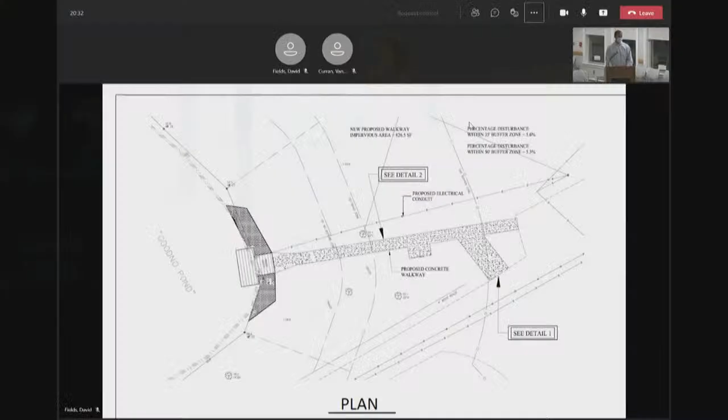Right, we're also trying to keep, I think, in matching the aesthetics of the place. I know you talked about pavers, and I think concrete would also be a good alternative, but asphalt would probably be a little bit out of the norm of what you typically see at the park. Thank you, that's all I have.

Chelsea, any questions? Not really. I'm very familiar with this site, I'm at this park like once a week. I know the path this is replacing is just a worn out area of dirt, so I think this will be an overall improvement. Aside from access, which is very important, I think this will improve the site. So yeah, I have no issues.

Vanessa, do you have any questions? No, I also agree that this is an improvement.

Okay, then just one final question on my part. If you had the money, would you do pavers instead of concrete? I guess that's more of a question for Chris Sanborn, who runs the show over there. I'm not sure if he'd want to do some type of fundraiser, if people would want to donate bricks, what type of bricks or paver he'd want to use. That's something we can definitely talk about. If you're more inclined to have pervious pavers, we can have the discussion and come back to discuss our options.

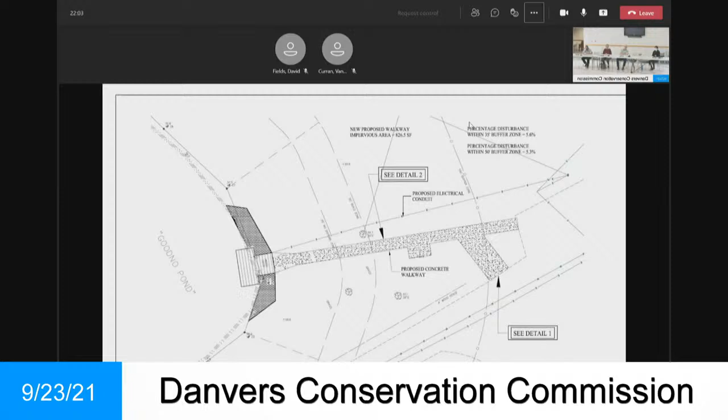What's your timing on this? You want to do this quickly? We'd like to do it within the month of October, as quickly as we can, before the winter hits, because the fishing pier should be constructed within the next 2 weeks, and once that's completed, we'd like to tie in the walkway as soon as possible before the winter.

Okay, so Chris Sanborn is the director over there? Correct. Okay, so we'll leave it up to his judgment.

Okay, are there any questions from the public? Sir?

Bill Bradstreet, Town Meeting Member, Precinct 1.

Out of the options presented, I think the worst of them would be the asphalt. It could be somewhat hazardous, with the leaching of the asphalt into the ground. That would be the last option, as opposed to what was presented with the concrete or the pavers.

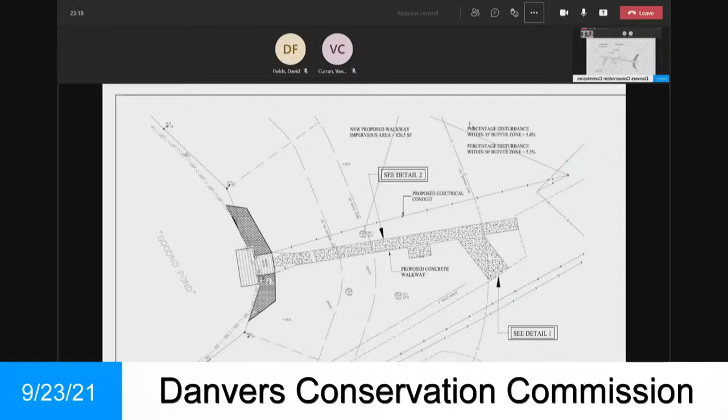I don't want to speak for Chris Sanborn, but I think from a maintenance standpoint and permanency, the concrete would probably be a better option than the pavers. The pavers would probably be fine for several years, but if they start to shift or move and they go in to do snow removal with any type of equipment, it could ding a paver and then you'd have to replace that.

I'd be concerned about wheelchair access if the pavers shift. Well, my argument to that is you can go in and repair pavers. Concrete is permanent, and if this park ever goes away for whatever reason, that concrete is there and it's got to be removed. But that's a personal opinion of mine.

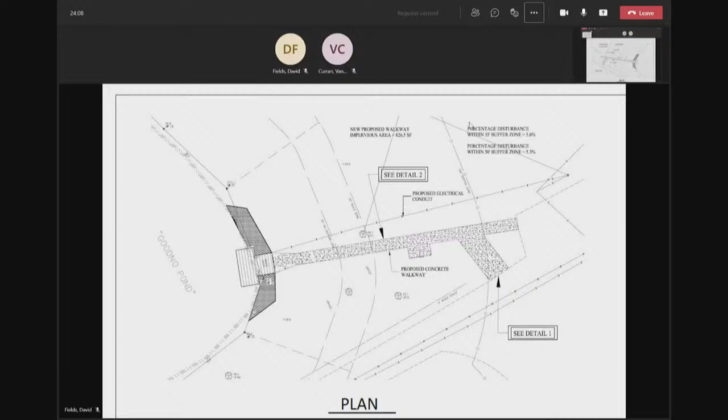Okay, no other comments from the public? So the first item we need to do is close the public hearing. If someone can make a motion. I make a motion to close the public hearing for 21 Ingersoll Street Amendment Request, DEP file number 14-1358. Is there a second? I second the motion. All in favor? Aye.

Now if someone wants to make a motion that we amend the existing order of conditions to allow the construction of this walkway. I'll make a motion to amend the existing order of conditions for 21 Ingersoll Street, DEP file number 14-1358. Motion's been made, is there a second? I second the motion. Before, let me just take a step back.

Any other conditions, Chelsea? Did we do anything? No specific conditions. Okay, motion's been made, is there a second? I second it. All in favor? Aye.

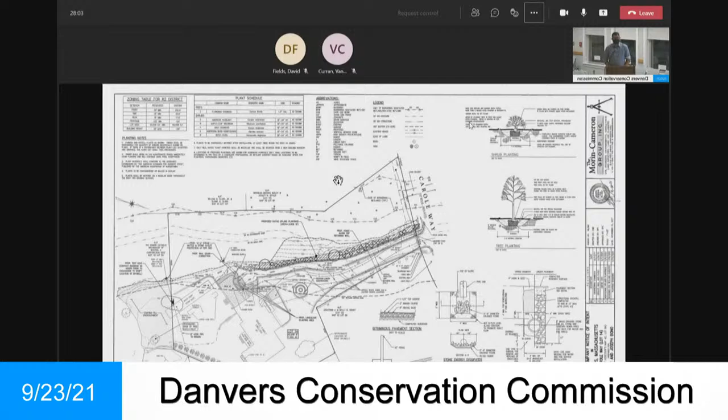David, you have the site plan? Perfect, is that the one? So I presented kind of a sneak preview at the last meeting just to prepare you for what was coming in. We then submitted the plan and the recommendation from Richard Kirby, LEC Environmental Consulting, who is a wetland scientist. He did an inspection of the property on August 6th, a few months into the first growing season since this winter, and he reported his findings in that letter.

A lot of natural growth has come in over the season, and then he prepared the planting schedule and recommendation, which now appears on the plan. The plan also reflects the stormwater management adjustments to the dry well in the rear, which is what we worked through with Mr. King, who had asked that the pipe conveying runoff from an abutting property out towards the wetland be plugged, with the dry well to remain.

However, he wanted us to do a test hole to confirm its location. We provided photos and documentation of the installation, but he'd like us to actually open it up and locate it, and make sure that's on the final as-built. The only work we're doing in the drainage is on the existing pipes in the ground. We're going to stabilize those with stone outlet protection, including a filter fabric between the stone and the ground surface.

Where are those pipes, Scott? There's a pointer up there too if you need it. Old school, he's got his own. You can use your finger, it's okay. So, David, perhaps for anybody watching, we can zoom in. Dim that a little, or use the mouse cursor just to highlight, because I can't see maybe what I'm pointing at.

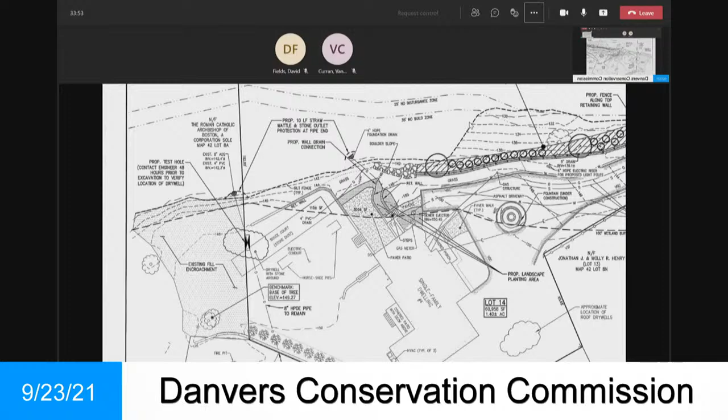Okay, we have the letter, Dave, from Mr. Kirby, and we have a response from Rich Kirby. Are you referring specifically to the plantings? Yes, that was the agreement that he was going to submit. There's a letter that was submitted, it was emailed to Georgia. Yep, I have a letter here. Do you want me to put it up on the screen? Yep.

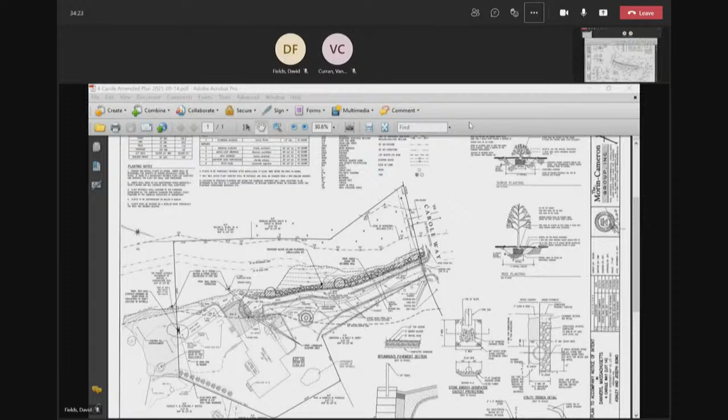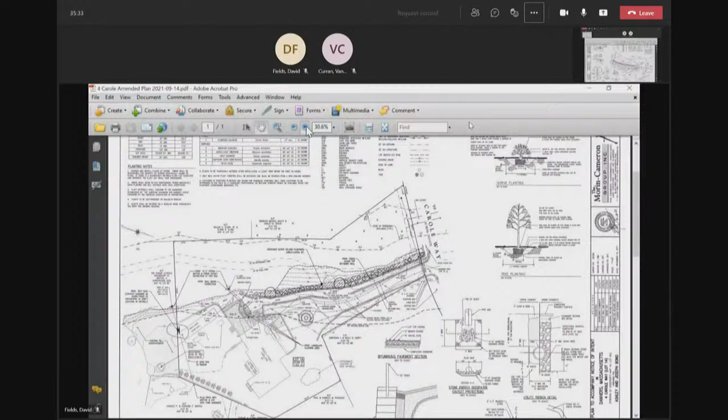What are the native sapling trees? If you go back to the planting plan, they're on the table. And is it a variety of shrubs? Yes. Able to zoom in on the table. So you have the flowering dogwood as the primary tree, and then the shrubs include hazelnut, viburnum, gray dogwood, a different kind of dogwood, honeysuckle, and witch hazel. Okay, good. Very cool.

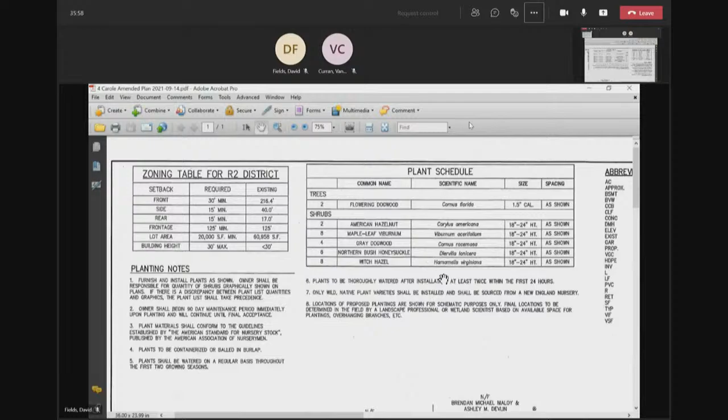Okay, that's the questions that I have, so let me ask the other members if they would like to ask questions or offer a comment. So, Ann, go ahead. No, I was happy with the plantings we discussed at the last meeting. I don't have any questions.

Okay, Michael? Yeah, what's the cost of the plants and the cost to plant all these plantings? I couldn't begin to tell you what the cost is. Why not? The prices vary. I don't know, maybe Mr. White can.

We have gone to the company, New England Wetland Plants, and they're in... Excuse me, come over and identify yourself. Hi, my name is Bob White. I live at 12 Nomkeg Road, Danvers. I'm Ashley Bono's father. We've been in contact with New England Wetland Plants. Again, they're in the Amherst area. We have not gotten a specific quote from them because we didn't know the number of plants that would be approved or not approved, or the type of plants that would be approved.

We've confirmed that the plantings are available and we would go out and pick those up, but there is not a specific... You haven't asked for any estimates? We have not asked for any estimates because it's unknown at this time as to what you would approve. Well, I think we need to post a bond to make sure this gets done.

And does staff have an idea as to what the cost would be for the plants? So for the 2 saplings, the 28 shrubs, and the inspection of a dry well, the town engineer was, in a round number, suggesting $4,500. And then...